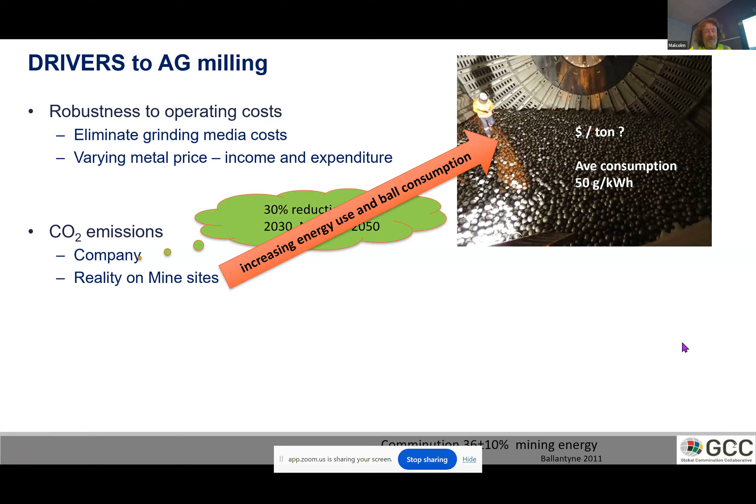However, quite standard around the industry is we're increasing energy use, kilowatt hours per ton, and ball consumption by converting to more of a SAG mill or run-of-mine ball mill, and therefore pushing up our steel consumption and steel use. So the reality is really different to what we're proposing as an industry.

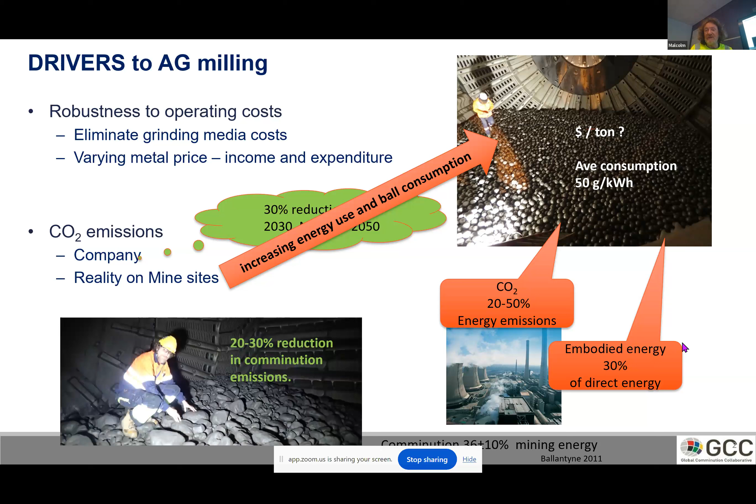If we look at what's the CO2 emission from the grinding media side, it depends very much, of course, on the ore and the fraction of grinding media and how fine you're grinding. But somewhere 20 to 50% of our emissions are from the grinding media because of the production of the steel and the transport of the steel - significant factors in the CO2 emission. Then the embodied energy or indirect energy that goes into manufacturing of the steel grinding media is about 30% of direct energy. So about 20 to 30% reduction in comminution emissions is a viable target by going to ag.

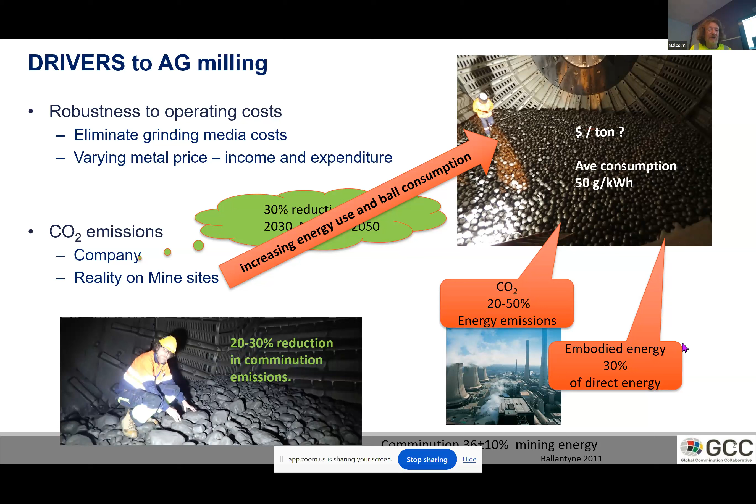Is that forwarded to the next slide, Tulia? Ag mill risks and challenges? Yes, everything is right. Oh, good.

So why don't we just ag mill? Having said that, well, it's a great thing. Well, why aren't we all doing it? There's always a reason, of course.

The original reason we started with ag milling and converted to SAG and then high and ball load is the sensitivity to ore variability. So the rock I'm holding, how competent is the rock that forms the grinding media? And if it's too competent, you overload and can lose your grinding charge. If it's too soft, you can swing between overloaded and underloaded.

At variable feed rate sensitivity, the pebble discharge rate varies a lot depending on the size distribution and competence. It varies with SAG milling too, but it's more sensitive in ag milling.

The other thing is it naturally produces a fine product because there's a lot of abrasion. Those pebbles on the right that are wearing out produce really fine, sub-100 micron material by abrasion.

So uptake barriers: can we predict the performance reliably? When I look at putting in an ag mill somewhere, or speaking to someone about putting it in, well, we're not sure. Should it be this size or that size? How sensitive to variability? What's the rock going to be in 5 years' time, 10 years' time? Will it still be suitable to an ag mill?

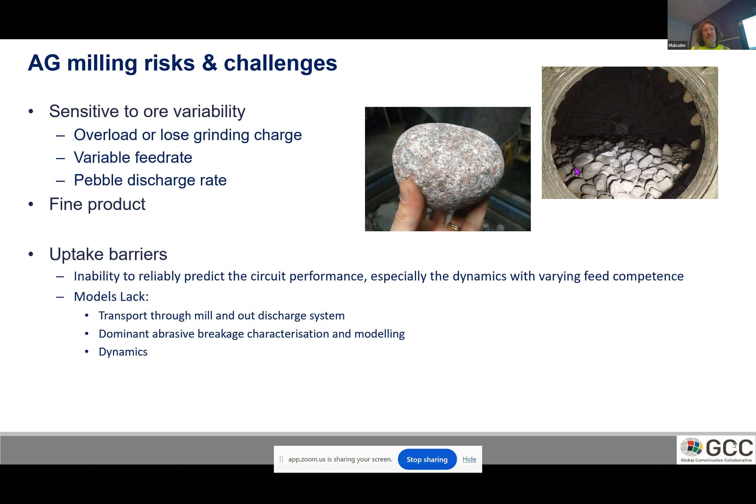How is this mill going to vary rather than the average? The variability is really important in understanding the process. And it's a risk, justifiably seen in the industry, saying well, if we just fill it with balls it's more stable - which is true, but not fully true.

So what are the uptake barriers going to the feed variability, characterization across the ore body? How is it going to vary over time? And are we characterizing it in a way suitable for understanding ag milling? We've got two - one, we need to characterize it more than the other. We need to characterize it in a way to understand, for example, the abrasive side of it.

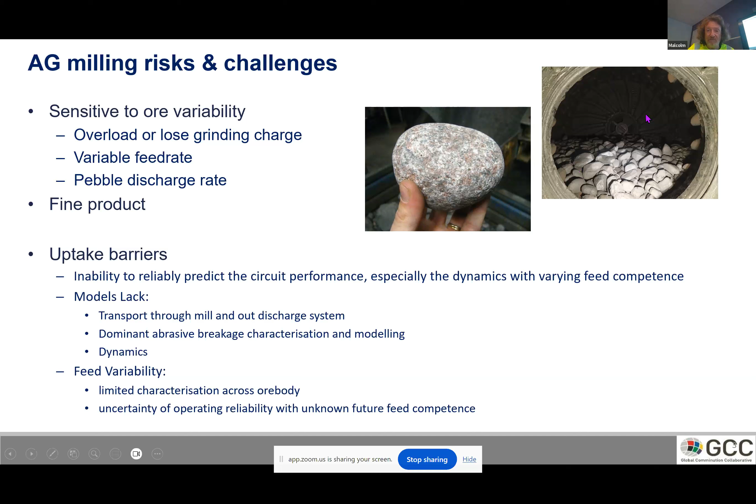But there are many successes. There's the 22 megawatt Aitik Boliden mill. There's the whole bunch of Boliden mills I mentioned, been going for 70 years. LKAB, many more in Scandinavia, Olympic Dam in Australia - just to have a nod to my home country.

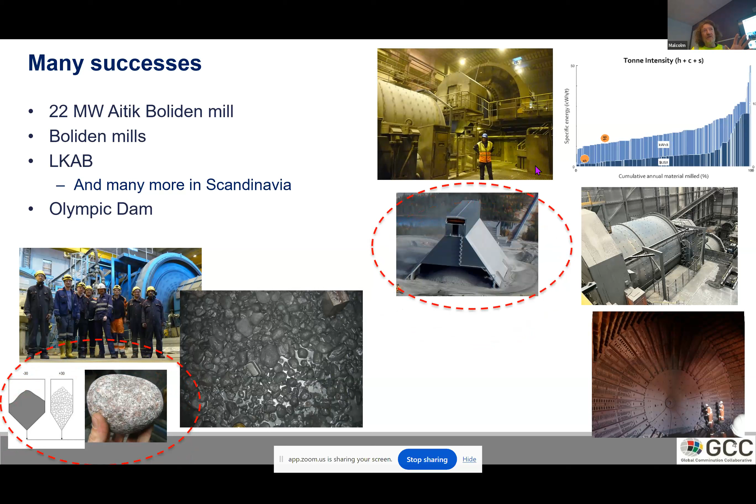But there's something interesting. If I look at LKAB, bottom left, they have a separate bin which they use to separate the coarse and the fine, and they can use that for controlling the balance, which they do. Aitik has that big A-frame feeder so that they can distribute material between the two parallel mills and get a more stable feed coming in.

Plus, it's not in the photograph, but on the mining side, every daily meeting is about what blend you're sending - you can't be out of spec for the ag mills. So it's not just grades, it's actually competence spec, and they're right on top of it.

And the bottom photograph with Mohsen and I is one of my greatest moments in my research career - we controlled that mill to 21 plus or minus 0.1 megawatts for 3 hours, fully ag. That's just amazing, and that was due to the fact that they control the blend from the mine and control it at the stockpile. So yes, you can have stable feed and stable production.

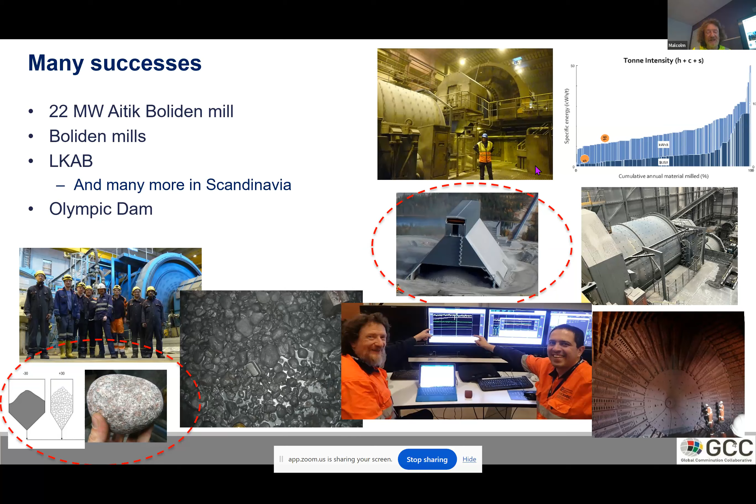And the mill length - adding power by just adding mill length is not a linear increase in feed rate by any means. This is where they came to us with queries about it. So they've eventually gone, because of the uncertainty of that and the discharge, pebble discharge, they're doing aggressive fine crushing of the pebble recycle, which is an excellent thing to do.

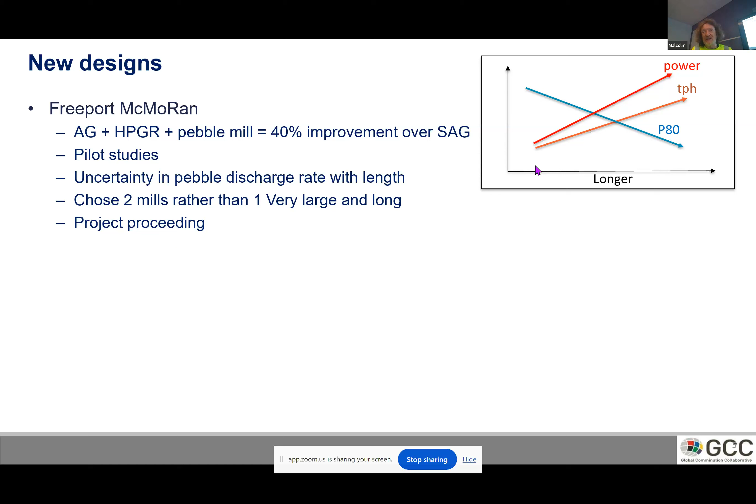They've gone for 2 mills. We weren't able to answer these questions, and in the brief time we had, we had a look at it, trying to extend our models.

Another one I did, with Marcelo and a PhD student, a masters student, was itabirite ore - everyone knows there's no way you should be able to AG mill it, it's too soft. However, you just need to have sufficient of the competent intersect layer, so the interface layer, to get enough rock in the mill.

So you can see on the left, absolutely fine. On the right, not enough rock in the mill - it just completely grinds out to sand. So yes, it's possible, and it is a lower size specific energy than SAG milling, but you need to control the feed. If you don't have that handle on your feed, you've got a soft feed, you're going to run into trouble.

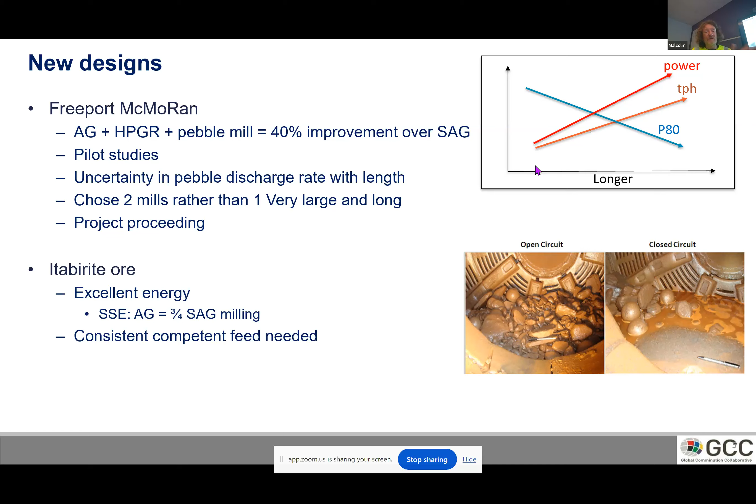So I see the uptake, being able to predict what your circuit is going to do, is a real key to uptake - so if you're going to predict the design of a mill circuit, production and mine planning, daily operation, that I indicated at the beginning, that's one of our major risks or barriers to uptake.

And the other is the dynamics - the control, the hour-by-hour control. What if the ore type changes? Dealing with surges coming in, with the load going up and down, content changing in the mill. What if I increase pebble port size? What happens if I'm more aggressive with the recycle crusher?

And the high overall equipment effectiveness - you want to make sure you can push your mill to drawing the full power and getting the full use out of it while stabilizing the product. All of this is kind of a dream in mineral processing when we're varying the input - it's not actually possible to have a completely stable output, all aspects stable, when you're varying the input.

You've got to choose what you're going to vary. So you could go for a stable product size and vary feed rate, for instance. But the more we understand blending - for instance the coarser or more competent with the softer - we can maintain that balance within a window.

It's not a point, so it's not a PID loop - within a range you get this amazingly stable operation. It's quite interesting - you can be 20, 30% around a midpoint, and your mill will be stable.

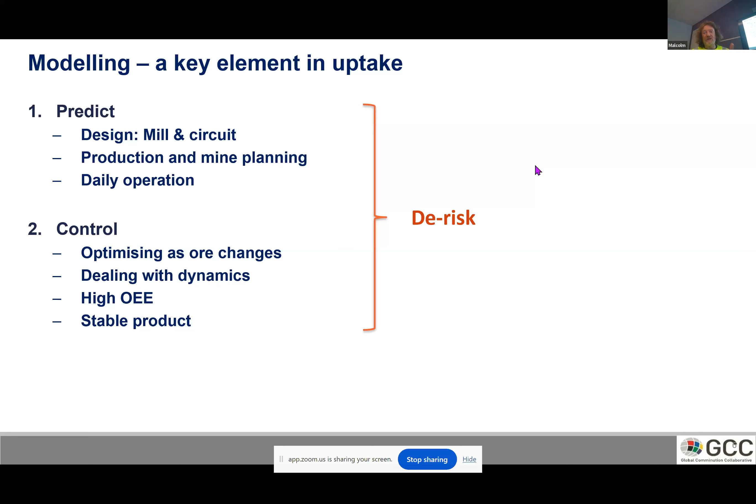So how do we de-risk this? What are the essential subcomponents we have? Well, the feed - and the feed varies. So what happens in the mill?

We've got breakage with impact, we've got attrition, we've got slurry grinding between the balls. So we've got this whole grinding action that we really want to emulate in our models, not have some backfitted rates model. We actually, to understand and predict this reliably, need to understand what's in there - and that competent feed greatly dominates the content.

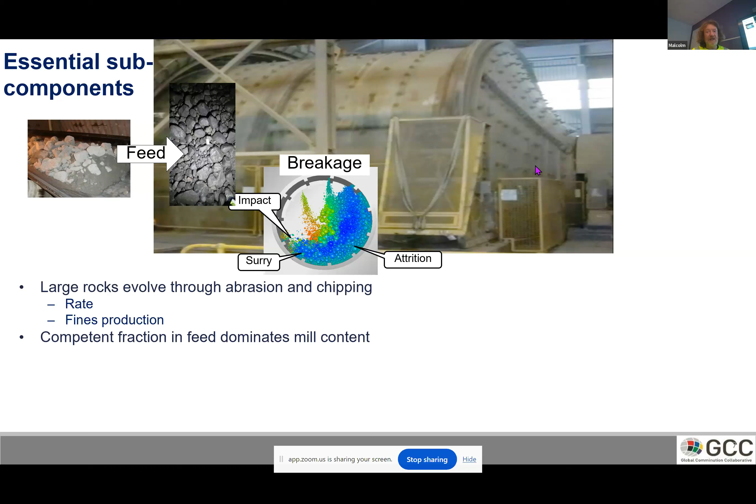Then the transport, which we'll come to next with Guillaume - how does this transport down the mill? I've got some great photographs in the ITEC mill I presented in the previous SAG conference, where as we changed the filling, we got a different size distribution down the mill. So it was changing with the filling as it went from 20, 28, 35% filling - it changed the content in the mill.

The feed was in all cases equivalent, so the content is not well mixed - the discharge is completely different to the feed end. So to have success in modeling this, and definitely to have success in modeling dynamics, we've got to have a transport model where the model sees the change in content down the mill and knows, by size, the probability or rate of transport.

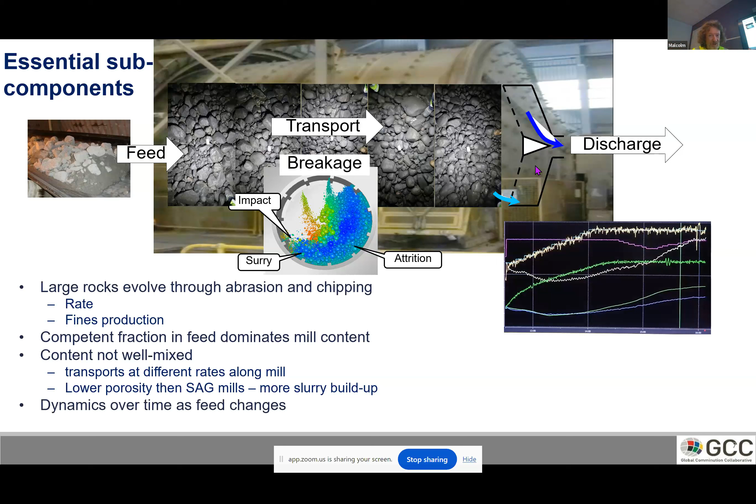And then, of course, discharge, which is an independent function, independent of transport through the charge - how does that vary as I change the design, as the percent solids change, as I change the mill speed, and so on.

So I can really break down the mill, and that's what we've endeavored to do, but it's not a completed model. Large rocks evolve through abrasion and chipping, the competent fraction dominates, content is not well mixed, and dynamics change over time as the feed varies, like the graph on the right. How is that varying as we were bringing that mill into stability and slowly tweaking the feed? These bits in the box are all lacking in standard SAG mill models.

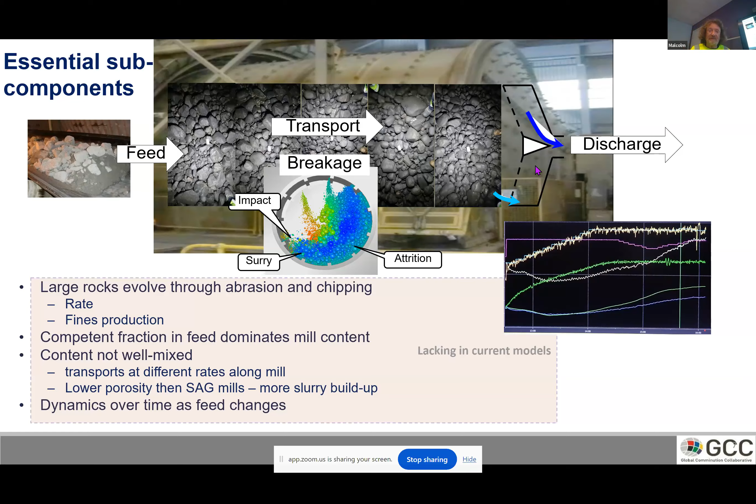So what are the building blocks? Abrasion breakage - we've developed a test at the JK which is purely abrasion, or as close as we can get to it. Unfortunately it uses a few hundred kilograms, so this is not going to be an ore body characterization test. However, if we can characterize into classes, we could test, say, the three major classes. Our objective is to move it into a small scale test, but we're not there yet.

Mohsen and I have worked on this with multiple students as well. It really needs a big push on the research side. Incremental damage breakage - a lot of work done, Marcelo's group, I've done a whole lot at the JK. We have a standard methodology, published methods of incremental damage where the rocks will slowly weaken and then break.

Multi-component impact breakage, where you've got different ore types - what's the probability of breakage? This is a cumulative distribution of fracture energy. Marcelo, coming out of the Utah group with Peter King, brought this to us, and we're using this strongly now in our modeling. You get a distribution of strength per ore type, not just an average. And the AG mills are more sensitive than SAG to that.

And the transport graph at the end, that will link to Guillaume's work on transport through the mill. Then I refitted just a discharge function, and it's rather different to the bulk one we fit at the moment, which is transport through the mill and out the mill all in one function. It is really different, with completely different rates out through the grates.

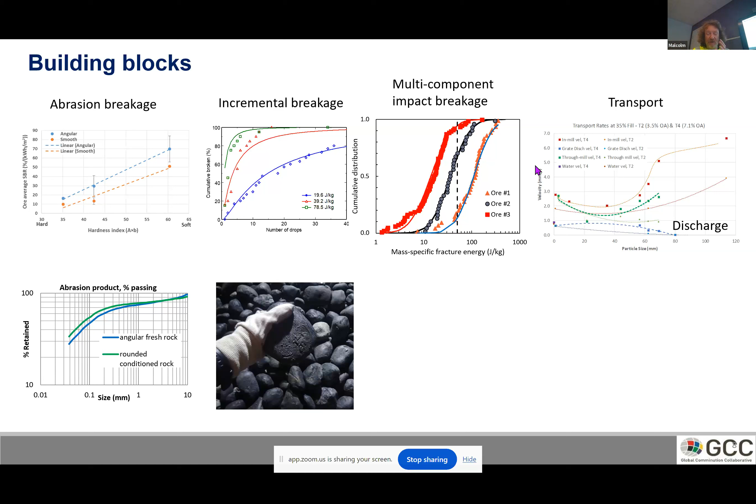Oh, someone needs to mute Magnus.

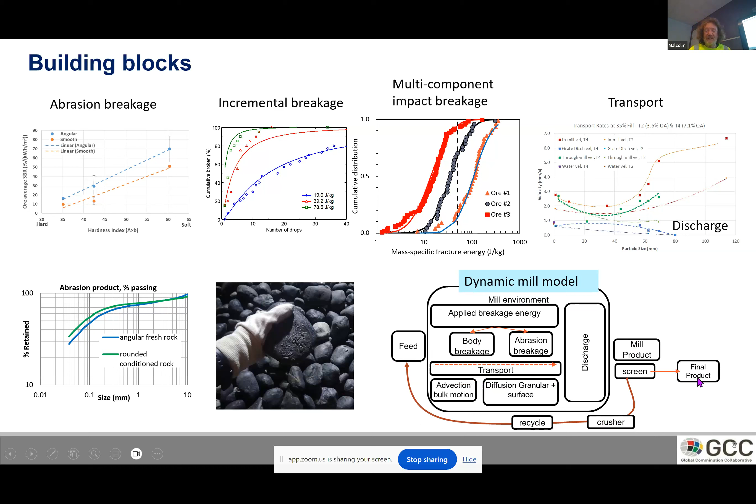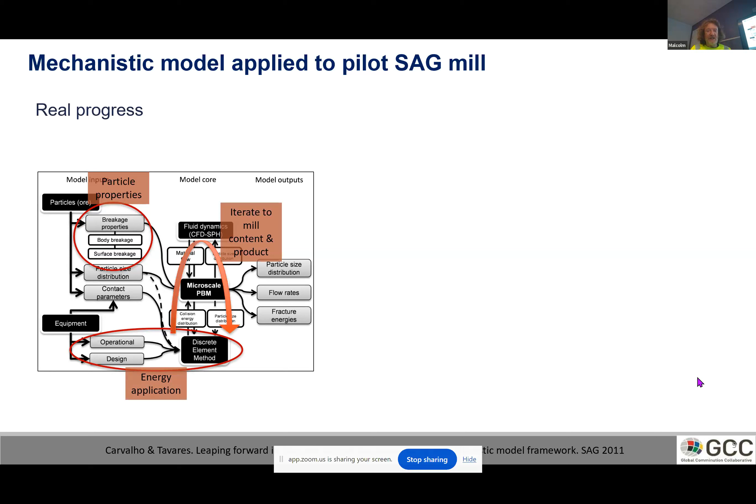So we have that, a fully dynamic framework running that. And Marcelo's gone one further with that - a microscale population balance model. Complex diagram, but I'll just go through it: in the front you have particle properties, individual particle breakage. In the core, we have energy application to the individual particles, the rate and probability of application. And then iterate to get a mill content, and then out of it, predict a product.

So this was actually done with some DEM steps in between with Rodrigo, and this is fully predictive. This is not backfitting of rates. This is: I measured the ore properties, I did a simulation, I got a product. And I did the test work and I got a product. These are amazingly good. So there really is a viable capability of doing this.

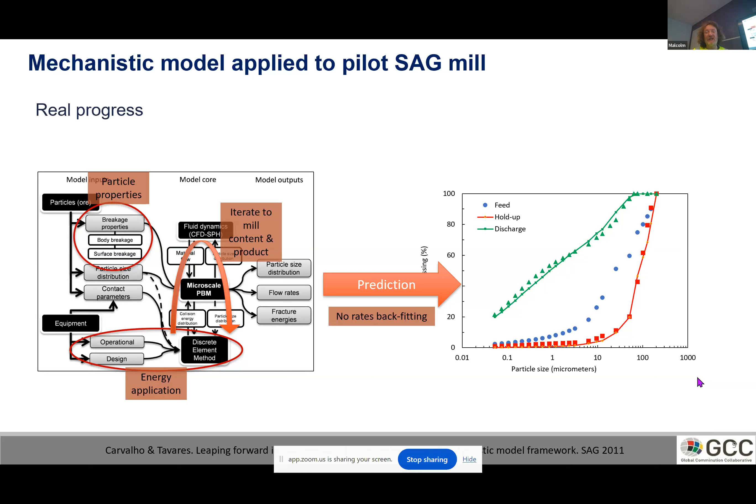This is a slow process in here, so getting it to be an online fast model becomes the challenge.

This is work I did originally with Ben Bonfils, the early version of our dynamic model. You see the top left is the contents evolving in each slice of the mill, and we see the cyclone overflow P80. We started with an empty mill and filled it up. You see the sump level in there, that's in that circuit I was showing, and then the P80 in each slice. So there we're evolving content in a mill, and there is convergence.

If I give it a stable feed, it will get to a stable content. If I vary the feed, it will keep varying.

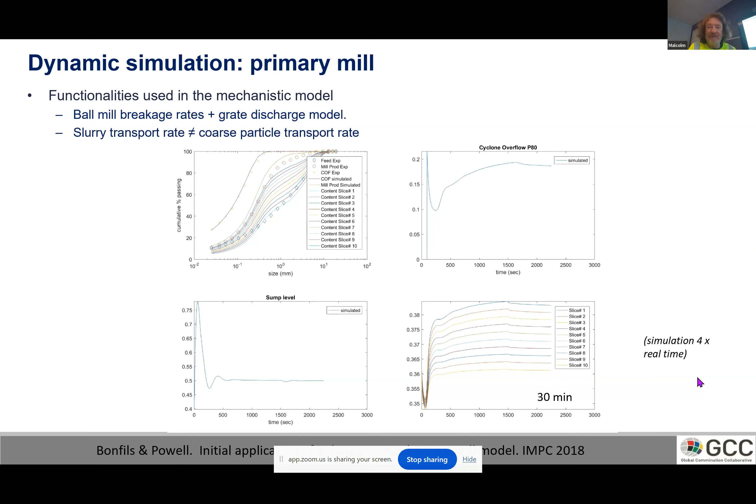So, upgraded mechanistic AG model. I've got a whole list there which I'm not going to read through, but de-risking design - I've been looking at flexi circuits for many years, really having a circuit where I could put a screen up front, take a split to a crusher, take the oversized to an AG mill, link to a pebble mill, pebbles to feed the pebble mill, and the rest recycle, possibly to a variable splitter, waste sorting, maybe an HPGR or another crusher. I couldn't simulate this except at a kind of conceptual level.

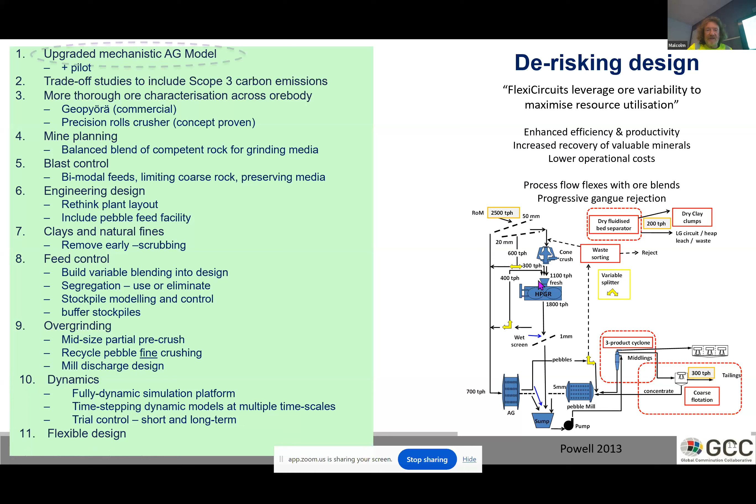And if I look now, what would I need to do that? The upgraded ag model, more thorough ore characterizations. I'm working with Geopyörä, I'm in the company. That looks like part of the information we can penetrate into the ore body. Precision rolls crush, I'm doing with Shuja, who's also on the seminar. Well proven for fine breakage, still lacking abrasion into the ore body.

Feed control. So you've got a dynamic system and you can test feed control systems on it. So you need a dynamic platform to get all these dynamics in.

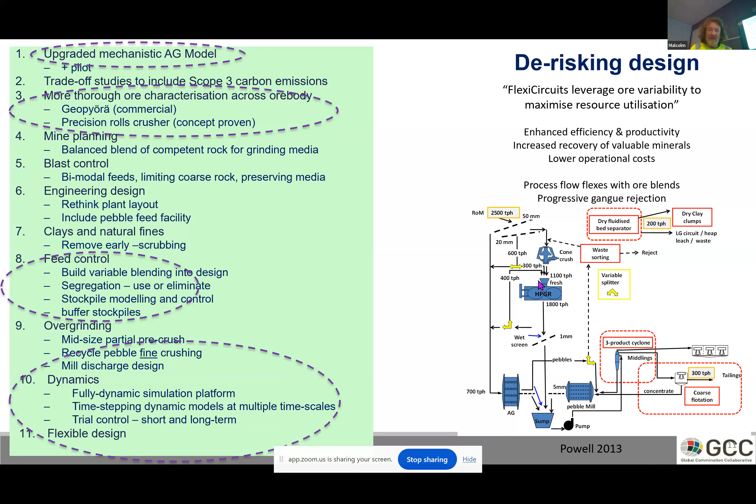But the good news is the GCC has come to the rescue. So there's the GCC. How about joining the team? And down here, I've got DyssolTEC.

We're working with a new open source dynamic platform developed on EU funding, to put an open source base and then a funded base with our models inside. Of course, we need funding to put them all in and have a truly dynamic platform with dynamic models in it, and that's where we're aspiring to go. Then we can look at the dynamics of a process. Our specific initial target is to get the AG mill onto that platform.

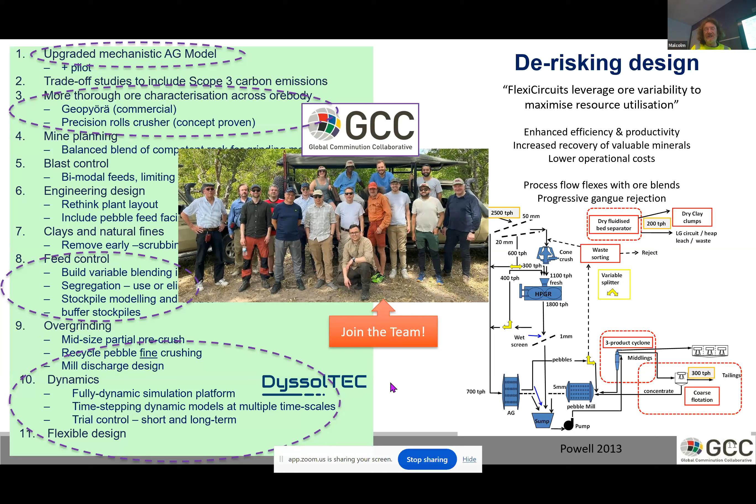So I hope that was fascinating, interesting, and fun. We won't take any questions now. I'm going to hand over to Guillaume to take you on the transport part of the presentation.

Thank you, Malcolm. This was indeed very interesting. All right, let me just share my screen. Let me know when you guys can actually see it. I'm seeing it, that's good. Yeah, we can see it.

All right, excellent. Well, thank you all for assisting to this seminar. I am Guillaume Chiasson from SGS, working from the Lakefield office in Canada. I'm here today to present the work we've done on a pilot study to look after rock transport rates and ag milling. I want to thank Malcolm, of course, for allowing me to be part of this research project, as well as André Vien from Freeport-McMoRan, who has funded this research program.

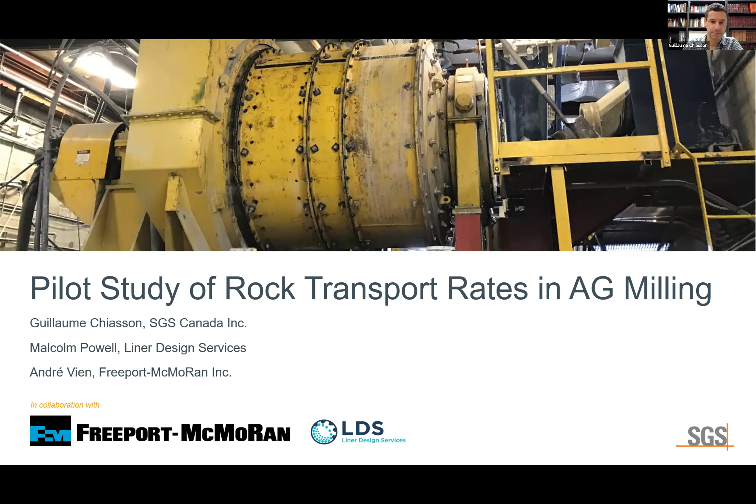Over a few years, Freeport-McMoRan has done extensive piloting here at SGS as part of a pre-feasibility study. We've looked at multiple grinding circuit configurations at pilot scale, including ag milling, HPGR used as a pebble crushing, pebble milling, SABC as well, single stage ag milling, a whole bunch of circuits. Among all this, some unexpected results occurred, such as material transport issues in pebble milling, as well as the impact of ag mill aspect ratio that Malcolm was talking about a bit earlier.

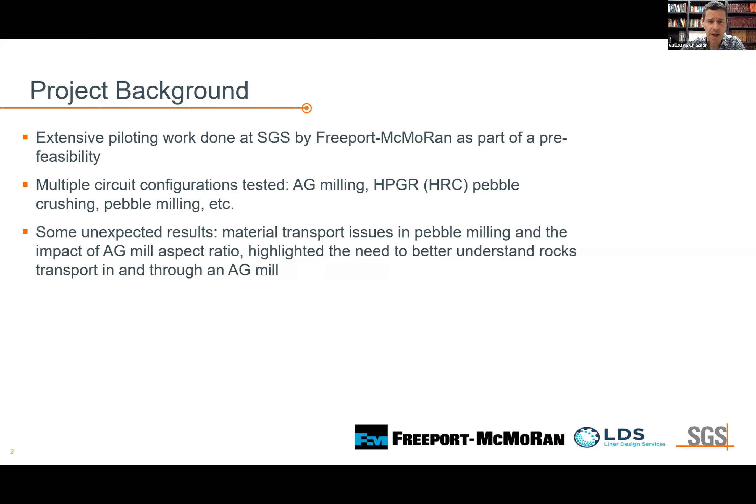Having a longer mill didn't necessarily mean a higher throughput, but rather a finer product. This highlighted the need to better understand rock transport in and through an ag mill.

So 4 pilot plant experiments were designed to meet certain objectives. For instance, we wanted to try to measure the residence time of rock particles through the mill at different size classes. We also wanted to measure the in-mill transport rates independent of the mill discharge. From these 2 measurements, we could then calculate the grate discharge rate of the particles.

To do that, 4 pilot plant experiments named T1 to T4 were done. We tested 2 different mill filling levels, a low mill filling of 25% and a high mill filling of 35%, as well as 2 open areas, a low open area and a high open area of 3.5% and 7.1% respectively.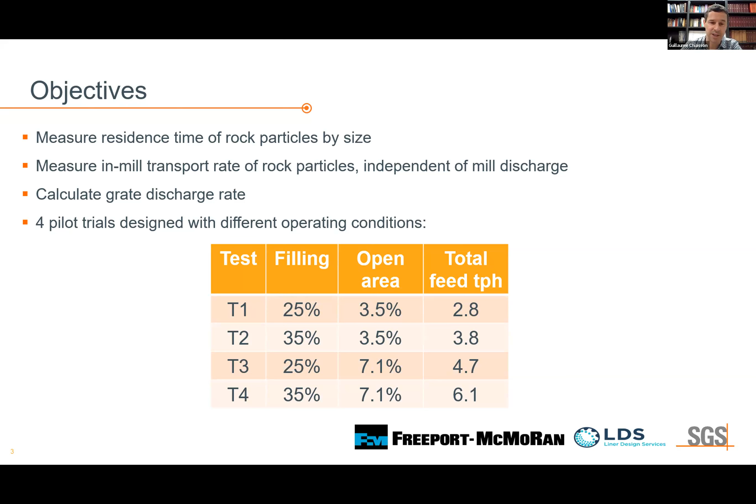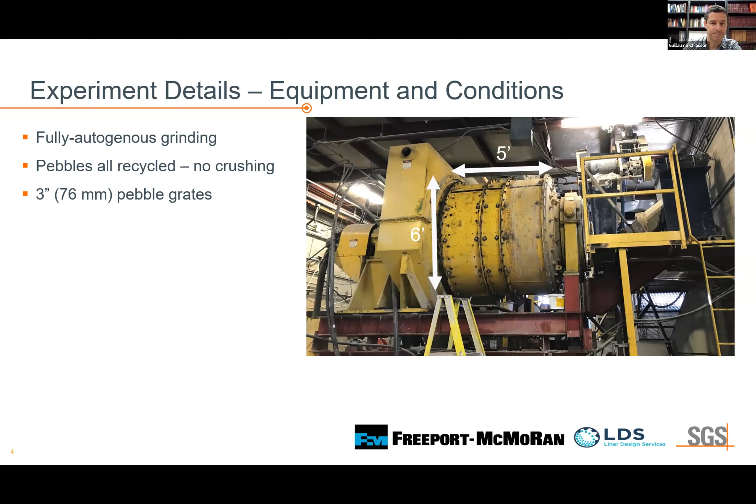This work was done in a 6-foot diameter mill by a 5-foot long mill, all fully autogenous obviously. The pebbles were all recycled back in the mill with no crushing. The idea was really to study the transport of coarse particles. We were using 3-inch grates, so 76 millimeter, in the mill. So we essentially had 2 main experiments.

The first type of test we did, we called it the residence time tracer test. In this test, we initially used painted pebbles as tracers. We used 3 classes of particles with 50 tracers each: a fine class of 19-25 millimeter, medium class of 38-51 millimeter, and a coarser class of 51-76 millimeter, which was right below the grate size. So the particles were obviously still able to get out of the mill. At steady state, we were adding 1 size class of tracers in the mill.

And because it's a pilot mill, the discharge is fully accessible by operators. So the mill discharge was discharging on a 48-inch screen, and we could manually recover the tracers as they were discharging on the screen. This was all videotaped, so we could accurately determine the time of the particles that discharged, and the time was recorded.

Unfortunately, not all tracers were recovered initially. As we can see in this picture, all these tracers from the 51-76 millimeter size class were originally all green. We had 3 to 4 layers of paint on each tracer, but the paint didn't last very well, and for many tracers only a few little pixels of green paint were left. Also unfortunately, a lot of the pebbles got destroyed or half ground in the mill, so for some we recovered only pieces of tracers.

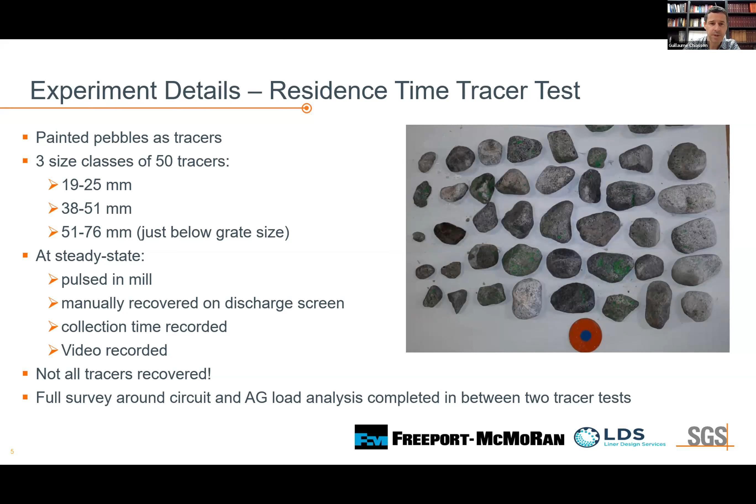Starting on the second test, we replaced the painted tracers with ceramic balls, which we use in different grinding applications. We used the same 3 classes: 19-25mm, 38-51mm, and 51-76mm. But as we made the coarsest size fraction, we realized this size was actually made of 2 distinct classes of balls, 51-63 and 63-76mm. So we decided to use that coarser group and divide it into 2 subgroups to get additional information. In this picture we can see the screen, the yellow operator top right, and a middle-sized tracer, and in another picture the small 19-25mm tracer bouncing on the screen.

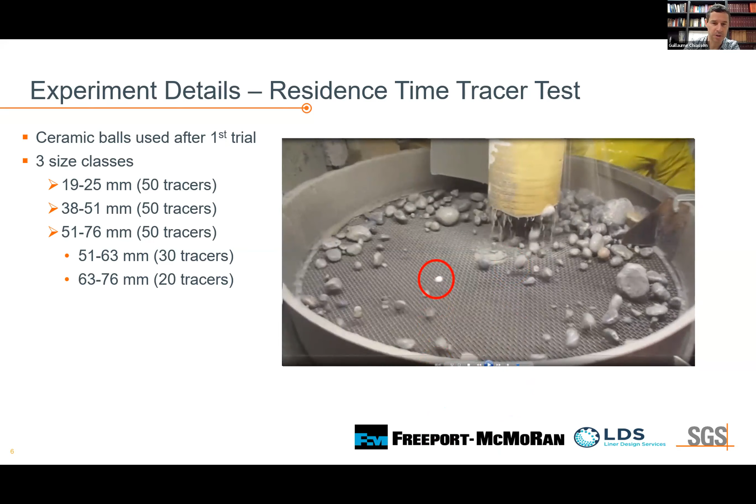The second test we did is the in-mill tracer test. In this test we used only 2 size classes of tracers with 20 tracers each: a 51-76mm size class near the size of the grate but smaller, and larger tracers of 102-127mm that were coarser than the grate and couldn't discharge out of the mill. Between 2 to 4 minutes before the actual ag mill crash-stop, these 2 size classes were added to the mill in 10 second intervals, which slightly disturbed the mill but not too badly. We let the material tumble for a few minutes, then crash-stopped the mill, got inside, and took pictures of the tracers like we see here.

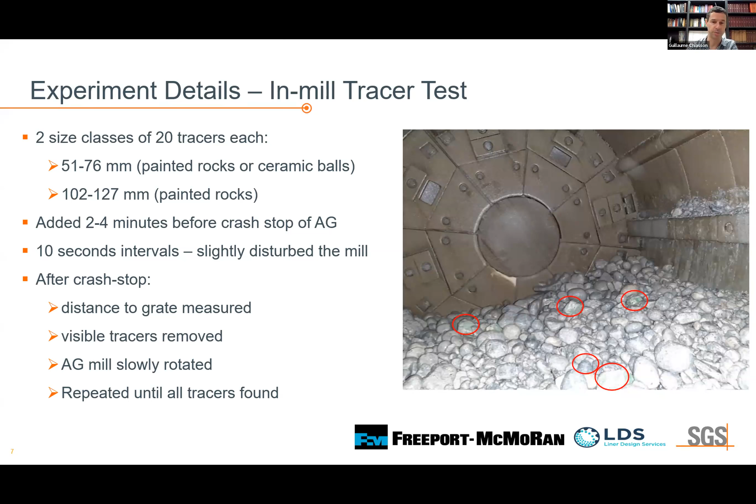We measured the distance between the discharge grate and the center of each tracer found, then all visible tracers were removed from the discharge. The mill was slowly rotated to expose new lifters, we got back in the mill, took new measurements, and this was repeated until all tracers were found. Here's another picture from this process.

Now looking at the results for the third test at 25% mill filling and 7.1% open area, the median of all 4 size classes is much quicker. They varied from 8 to 11 minutes for the 3 coarser size classes, and 14 minutes for the finer size class, so it's much quicker than the previous test.

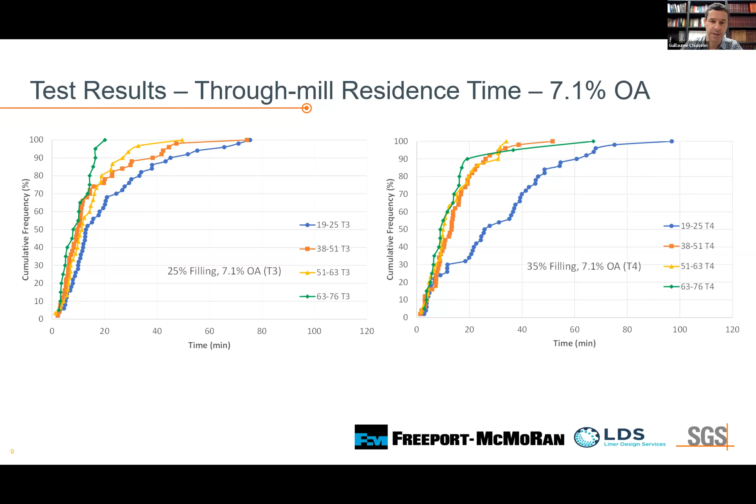If we look at the impact of mill filling on the rocks just below grate size, looking at the 51-76 millimeter rocks, we can see that at high open area, mill filling didn't impact anything really, because the two curves are essentially overlapping, at least for the coarser particles. It's not necessarily true for the finer particles, but for the near grate size, it didn't have too much impact.

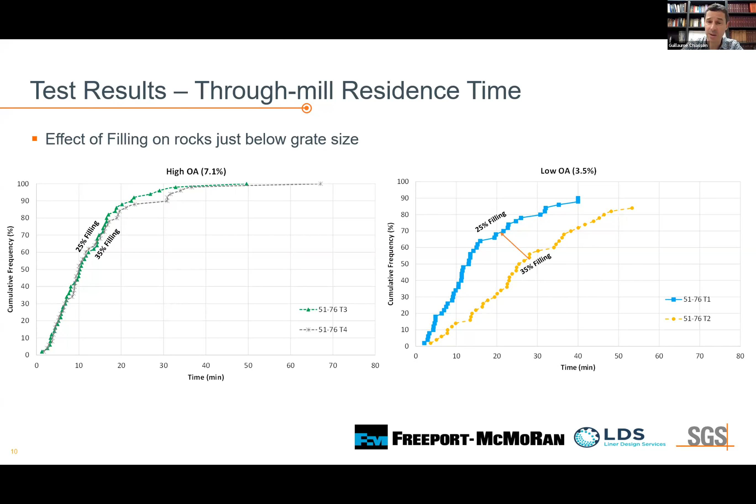If we look at the low open area, then the story is different. The low mill filling resulted in particles discharging a lot faster out of the mill than at high mill filling. That seems quite obvious from this graph.

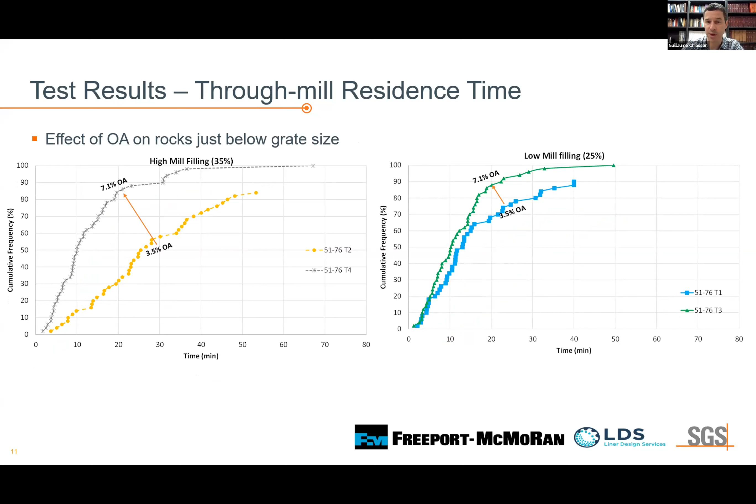If we look at it from the open area point of view, at high mill filling, 35%, a higher open area resulted in particles discharging a lot faster out of the mill, which seems to make sense. At low mill filling though, we've seen the same impact, but the difference is not as big. So the open area does help, but the influence is lower.

If we look at the results of the third test, at low mill filling and high open area, it's the other way around. In this case we've stopped the test a bit too late, because we can see a lot of the coarsest media is within the last 30 centimeters of the mill. But we can see that again, the coarser media travel faster than the finer media.

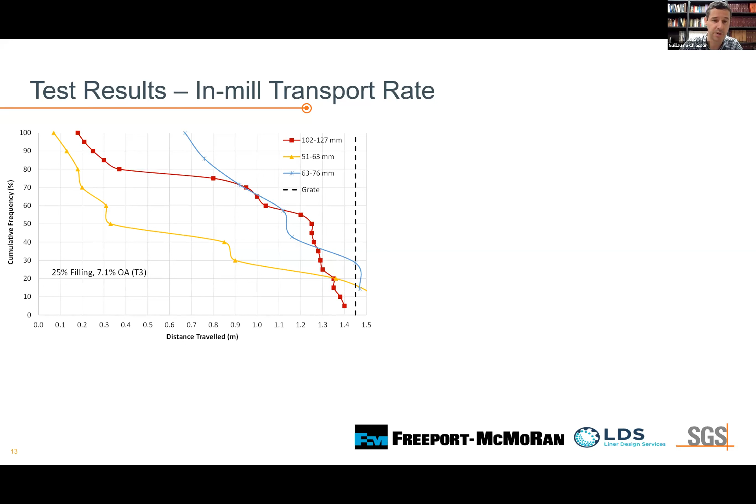Now, if we express the test results in terms of particle velocities, we see the velocity of the particles discharging out of the mill. I'm not going to go through the calculation details because it's a bit tricky regarding the discharge, but nonetheless what we can see here is the velocity of the finer particles is much slower than the velocity of the coarser particles. But this is the through-mill velocity.

If we look at the in-mill velocities, represented by the two additional curves here, we see that the in-mill velocities of the particles are much higher, but again, the coarser particles are traveling a lot faster in the mill.

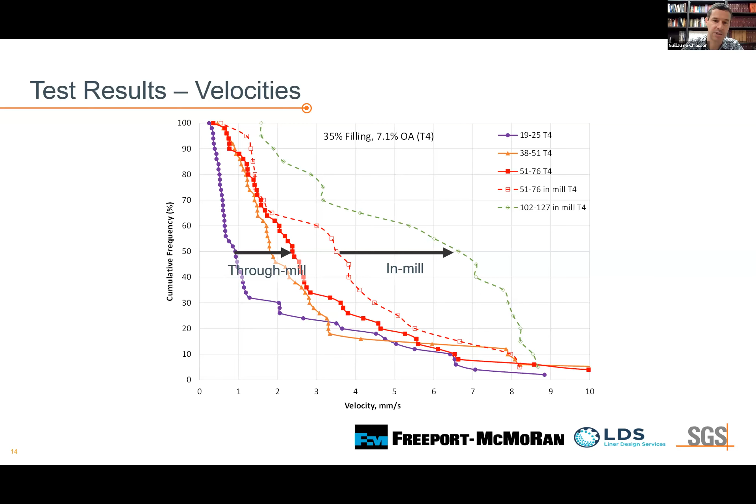Now, by looking at the difference of the two types of velocities, it's not quite direct, but anyway, this is one way to look at it.

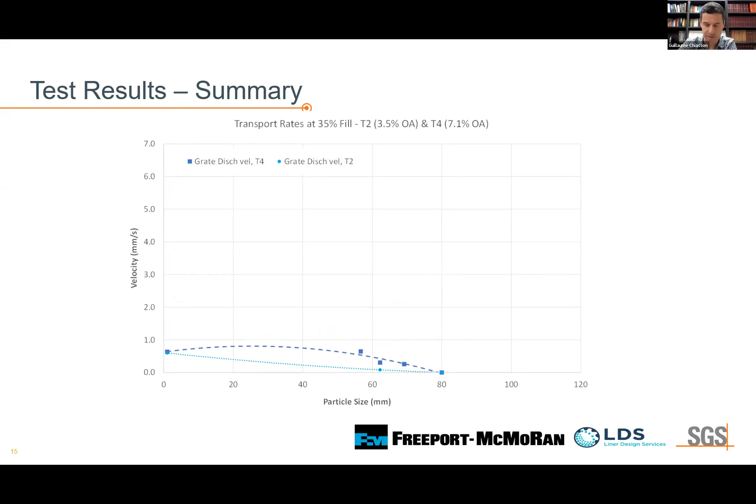Same kind of conclusion for the through-mill velocities, although at the finer size, it seems to be relatively similar. And then I think I'm running out of time here.

So let's conclude this quickly. Surprising conclusions: the larger particles are moving faster in the mill, whereas we tend to think normally that the fines will essentially bypass the mill and the coarser particles are the slow guys in the mill.

The slower transport rate for small particles is amplified for higher mill filling. There's a clear influence of open area on through mill residence time.

At low open area, the grate discharge is definitely the bottleneck, and all particles are behaving more or less the same through the mill residence time.

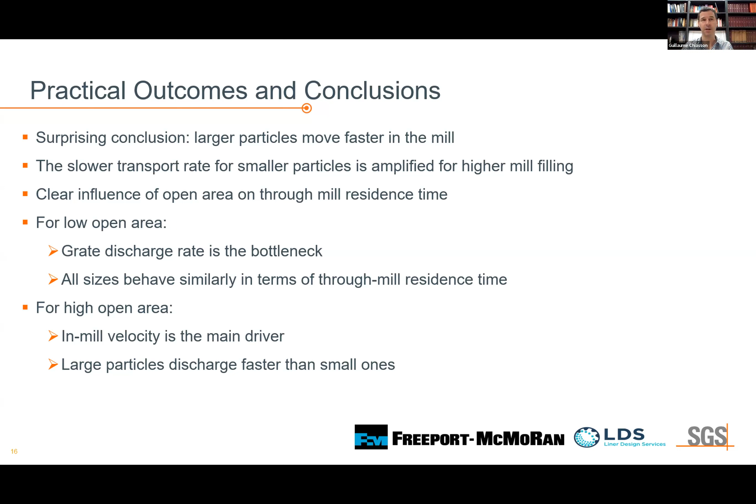However, at high open area, it's the in-mill velocity that becomes the main driver, and therefore the larger particles will discharge a lot faster out of the mill.

So this project led to significantly better understanding of the transport of particles through and in the mill by separating the two mechanisms. It has obviously an impact on better understanding the pebble buildup and the pebble discharge out of the mill. And I really want to thank you, Malcolm, but also Freeport for making this experiment possible

and allowing us to publish these results. So that's it for me.

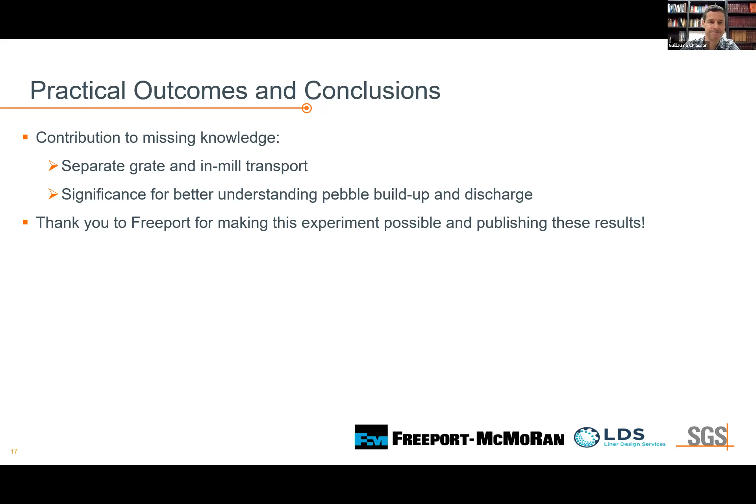Hello, can you guys still hear me? Yeah, well, excellent. I think Malcolm may have been having a technical difficulty. Thanks, Guillaume. Maybe Aubrey, if you're ready, you can take over for the last part of the presentation. Thank you, Marcelo. I am ready, but I'm not being allowed to share. I think you are, Aubrey. Maybe you can check. I can now share. I wasn't a few minutes ago. Yeah, sorry, it was me that was still sharing my presentation. Sorry. Yeah, I think so.

So what I'm going to present this afternoon, or morning, or evening, depending on where you are, is a presentation that I gave at the SAG conference on behalf of a whole host of people.

The theme was the AG/SAG mill design for low competency ores, and the co-authors for this paper were Sandile, who should be in the audience today. I haven't looked at the participants, and then Malcolm, as well as Talita Bell from Tronox.

So this is the work which was done at Mintek using the pilot plant and other mills that they have. The motivation for this work is that Tronox are in the mineral sands business, and they have been mining the mineral sands for many years.

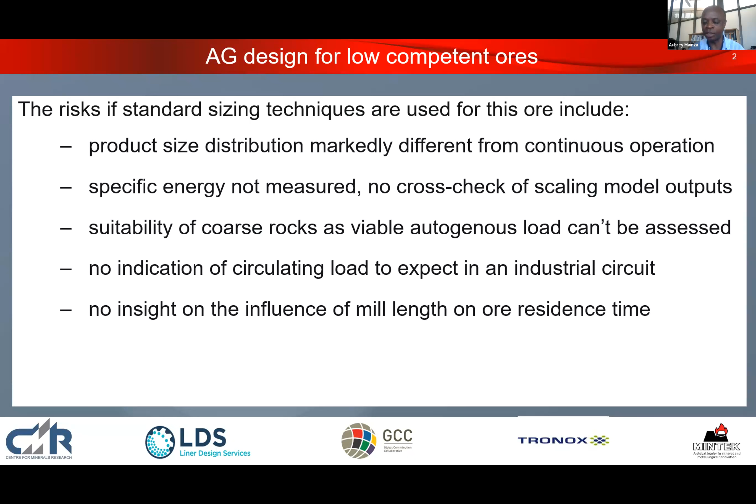The last part is it is very difficult to work out what a mill length would be. This touches on the previous presentation where they did residence time studies. You wouldn't know how long the material would last in the mill to get to the size you want, so inferring whether you have a long mill or short mill is very hard to predict from our conventional models. Based on that, a number of studies were proposed.

This work was done for Tronox, who currently are using an AG operation to process the ore on the neighboring plant, called the waste plant. Because of the new ore they have found, they are in the process of designing a milling circuit. Now all those questions and comments I gave previously are things that were put on the table, if they implement the AG milling, which is preferred because they are using the same technology on the waste ore.

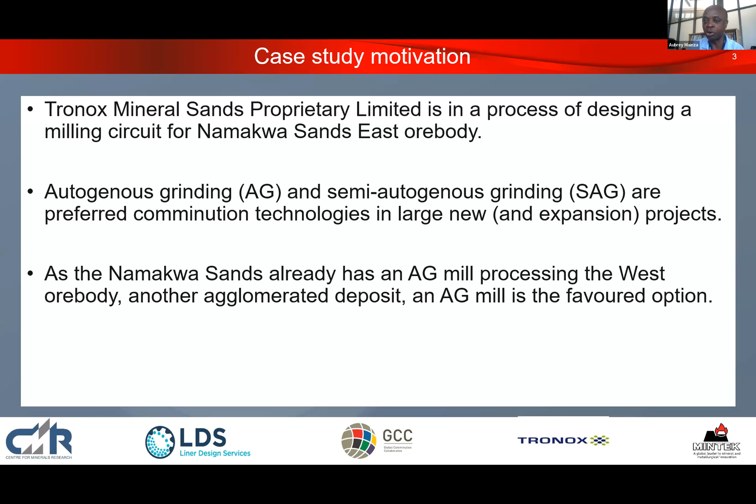What would be the length of the mill? Would the mill be able to hold the load? What would be the circulating load? What is the competence of this rock to act as media? Because of those questions, they commissioned this study.

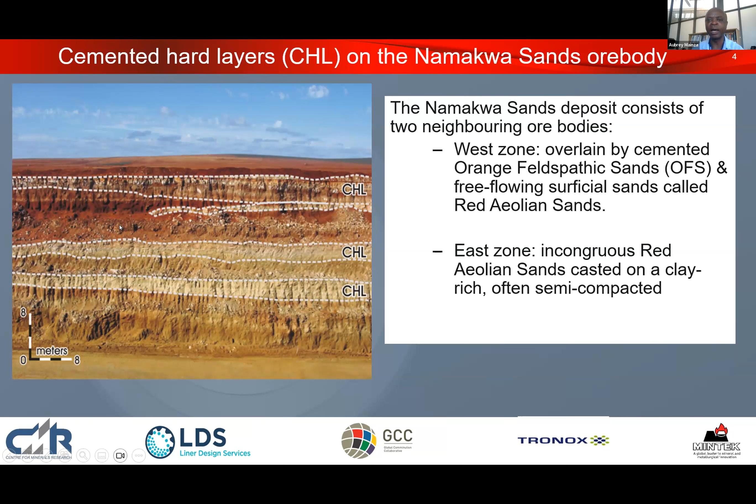But the east material has predominantly this layer more than that orange layer. So this orange layer has a bit of competent material in it, but that reddish material you see in there has a lot of incompetent material to act as grinding media.

Just to give you an idea, when I speak about incompetent material and competent material, I'll take you to this particular graph or table. You would see in this table, if you just look at the A by B number, for those familiar with the drop weight test results: if the A by B is low, it means your ore is very competent, very hard to break using impact. If your A by B is very high, it means your ore is very soft.

Now these numbers here, we have A by B numbers of 565, 962. Those of you familiar with the JK drop weight test table, they are not even in the table. They are too soft, such that we've not encountered these numbers before. So these are extremely friable and soft.

The west ore, or the west reef ore, which you see here as 312, is more competent than this, but even when you look at that JK drop weight test table, this is actually classified as very soft. So if this is very soft, I would shudder to think of what we would think of the other numbers that are above 500. If you look at the resistance to breakage by abrasion, which is this Ta, these numbers are very high as well compared to what we've encountered in the database.

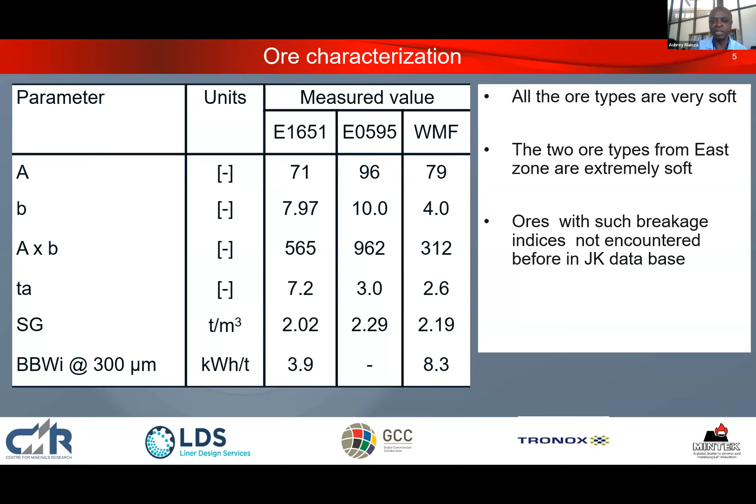The first test that was proposed and carried out by Sandile, who is in the audience, is the rock survivability test. The test is carried out by charging your rock survivability mill, which is this one here. You can see material is sized into various coarse fractions, then you charge it into the mill at up to a particular volumetric feeding.

Then you run the material for a period of time. You open, you discharge the material, resize it, remove the fines, charge it again and top up. For this particular material, the test was terminated at the first stage because the charge was found to be below 7%, which is very low.

Assume you are coming from, say, 35%, and you run one cycle and you are below 7%. It tells you that the mill can't hold the material. The material breaks very quickly. You can see the pictures here at the bottom, the fines and what has come out of the mill. There is a very small proportion of coarse material in there.

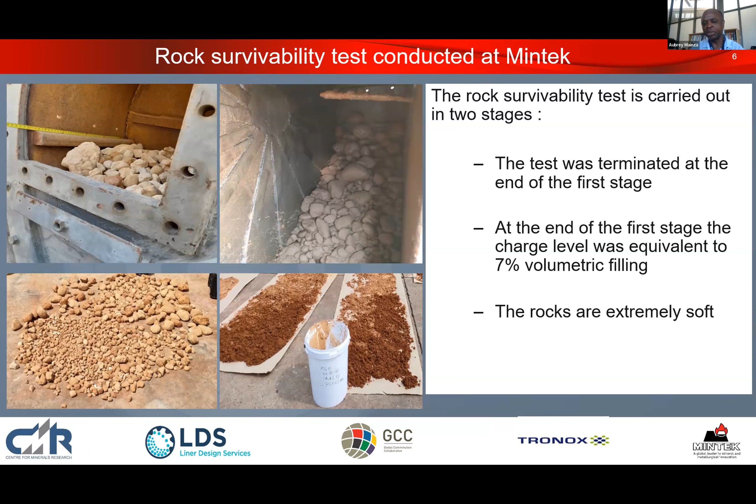So this confirmed that we would not be able to hold the load in an ag milling operation with this material. But our client and the design company were still insisting that they would like to design an ag mill, because that test does not speak to what they were doing in the model they were using. So we had to propose to do a pilot study, and we did a pilot study at Mintek, which has a Rolls-Royce piloting mill.

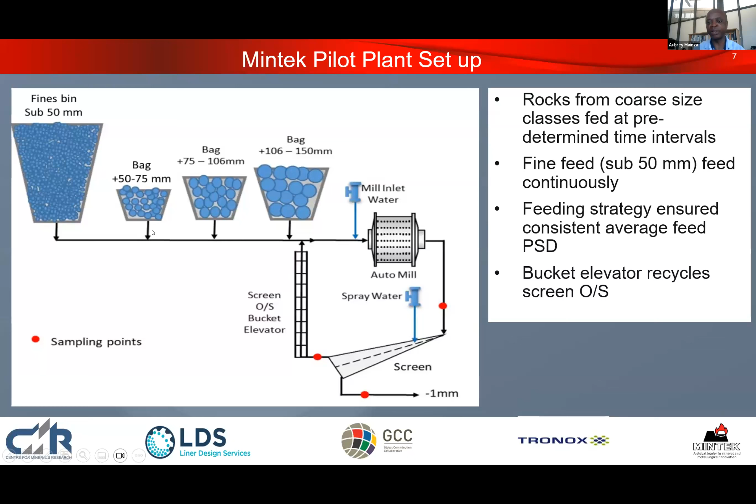The circuit used in that study would be like this one. You can see this is the ag mill, and the material from the ag mill discharges on a 1 mm screen. The plus 1 mm screen material would be transported back to the mill using a bucket elevator. Then they have a silo at Mintek where you can charge the sub 50 mm material, and you draw it using a belt feeder. We were charging other proportions of sizes manually at a timed interval to meet the required feed size distribution.

These are just the pictures of the system. You would see this is the material, the sub 50 mm material from the silo, discharges using that feeder, and we have this belt putting it on the main belt that feeds the grinding mill. What you can see from here is that we don't have rocks. Even after charging the coarser rocks to meet that PSD, you can count the few rocks on that belt.

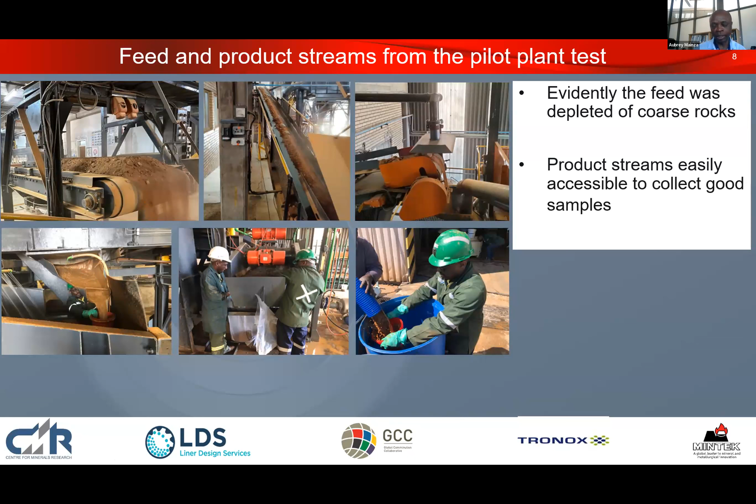The ore didn't have a lot of coarse material. This is the material going into the feed chute. And here we have the material discharging from the ag mill. Paul happily sampling that - excuse me. And then this material here would be the screen oversize being sampled and timed. This is the screen undersize. So the system was very simple to obtain very good samples from the pilot testing.

In terms of stability, most of you may know that it is very difficult to maintain stability if you have friable ore. It was a challenge to reach that, but we perfected the system to a level where we were able to get very stable pilot runs on this particular system. And what you are seeing here are just the conditions, giving us an idea of the stability of our pilot runs.

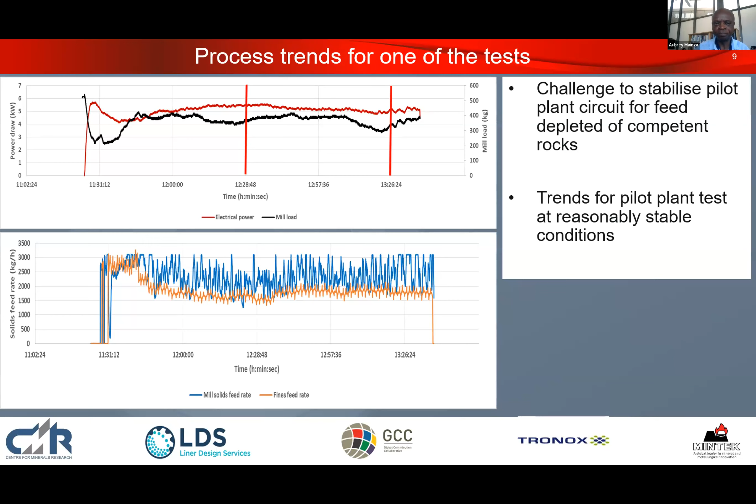This is just to give you insights on the charge inside the grinding mill. You would see up here that we actually blocked off some plugs to be able to retain some material during the pilot testing, and very little material was left in there. This is in the order of about 11 to 15% fill level during the piloting. We couldn't go higher than this.

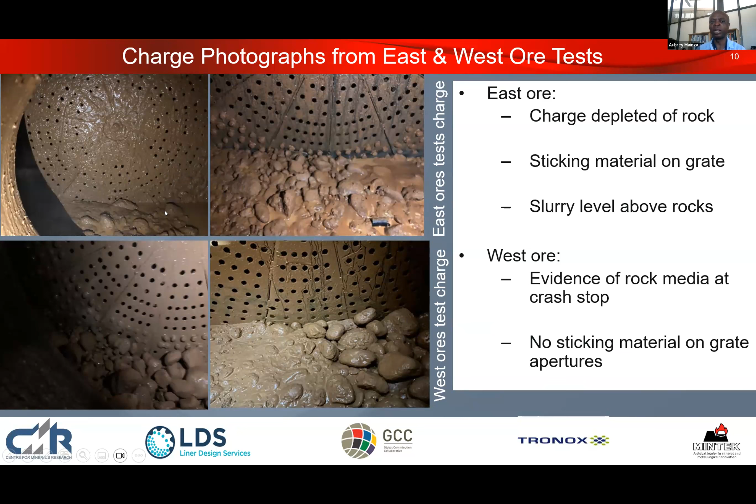At the bottom here, it shows you the contrast with the west ore, where you can see evidence of very big rocks dominant in the charge of the pilot mill, compared to the east ore, which had this sticky material. The discharge is almost covered by sticky material, and then the slurry was always above the rock load.

By way of PSDs that we got from here - on the left, we are seeing the PSDs for the east ore. If you look at the feed, that black line there, it's very fine feed. The red line is the product, the screen undersize. Then the recycle stream, which is a screen oversize, would be that material there in Botswana blue. And then the navy bluish material, PSD here, represents the mill discharge. You can see below 1 millimeter that the mill discharge is almost identical with the feed that we are putting into this ag mill.

On the right, we see a comparative test with the west ore. You can see this is very coarse, the feed, and then the product is very fine and much closer to the mill discharge than the east ore. This already tells you that taking what you do on the west mill and designing the east mill would give you a very different output. The performance between the two, for the system between the two ores, would be very different.

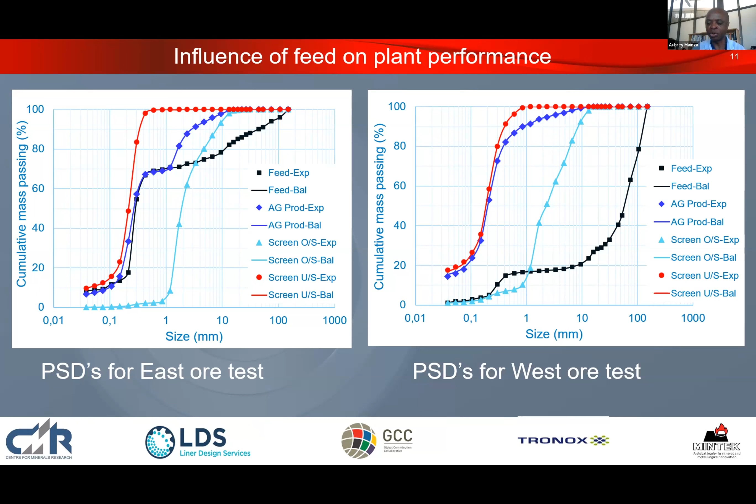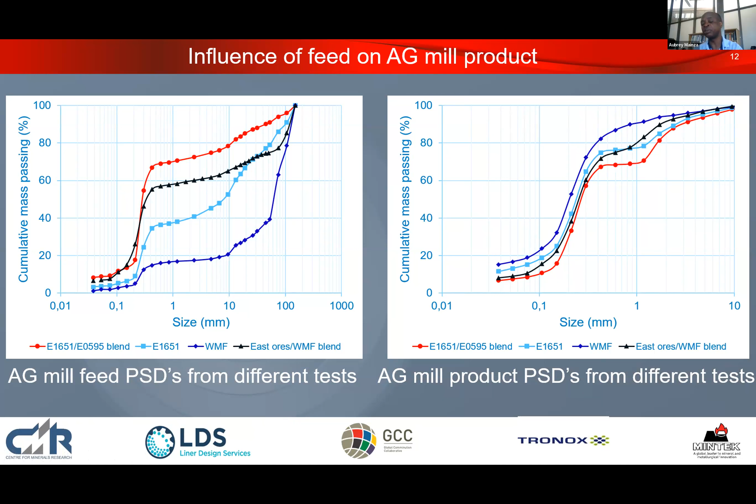What you can see on the right is the ag mill discharge. The east ore blend, this red line, is the coarsest of all the tests we did. The west mill product is the finest of all, the one with a lot of reasonably competent material that was able to build up the charge in the system.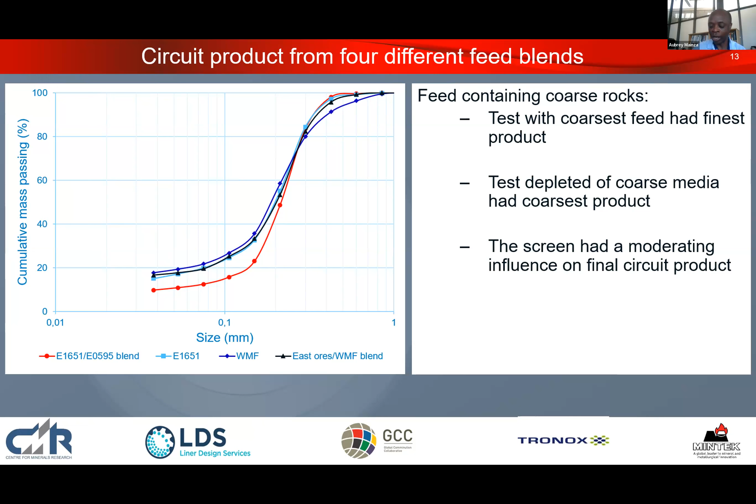Now, this is important because they were designing using a system with steel balls and getting the specific energy. So they designed specific energy before these tests in the order of 5.5 kilowatt-hour per ton. You can see it is way higher than what you would encounter using the pilot work, which is a similar system to what they are designing.

This gives you an idea of the sub-212 micron material. All the tests we did were in the range of 50 to 60% passing 212 microns. And in this particular system, material above 600 microns would represent a loss in terms of recovery of zircon, which is a key mineral.

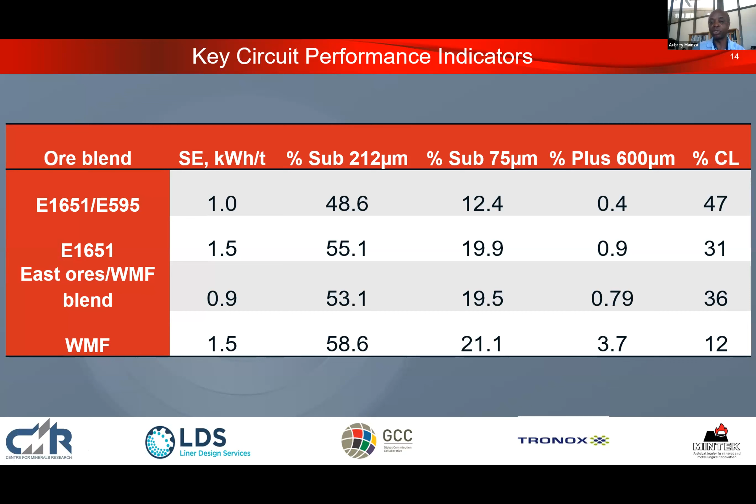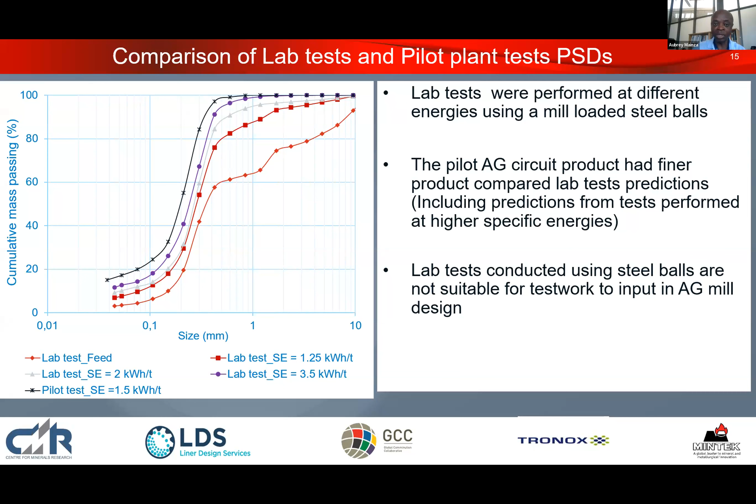This is catastrophic if you compare it to what we just looked at in the pilot plant, which is much more closer to reality than this. The second part is these tests cannot give you a prediction of whether the mill will hold the charge or not, because the charge is defined by the steel balls you put in the system. By way of conclusion, for low competency ore, an ag mill's performance will be very sensitive to the feed size distribution and the feed competency.

So you need to assess the feed competency to be able to design this correctly. The second conclusion is that using lab-based systems with steel balls are highly inappropriate for these ore types. They will be highly misleading, and they do not give an indication of the suitability of the charge to build up in your system. So beware of these tests that do not resemble the system you want to construct, and the model cannot take these as inputs to predict what an AG mill would do.

That would be the end of the presentation. I wanted to say this is the real design work that Malcolm, Sandile, and I are participating in. The second phase is to test what we can do to build up the load by seeding either pebbles or using ceramic media, and that's the next phase of testing. Thank you.

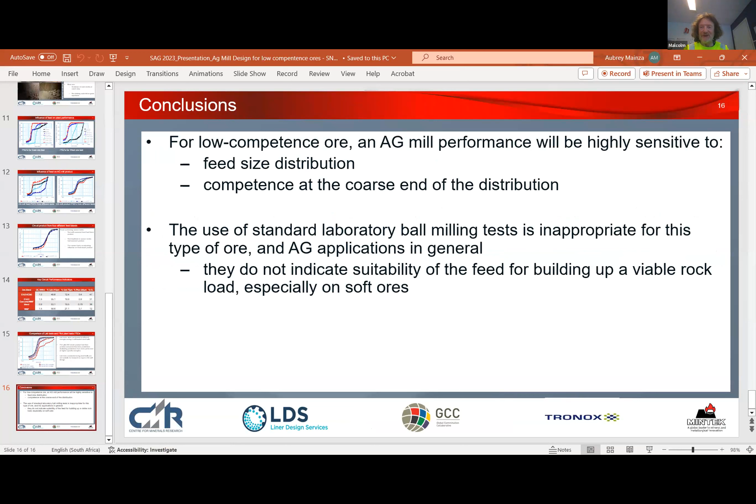I think Marcelo has a question. Yeah, so while people are warming up, just to make a short comment. Fantastic presentations there, but really just take advantage of a minute of Aubrey's time.

I think it's also a great conclusion you get, that in certain situations people insist on doing SAG milling pilot scale tests because they are not quite sure. But I think AG milling, especially for very unusual ores, we're far from being confident at the bench scale. So it's a great case to show that the easy question is no, if you want to go to bench scale. But if you want yes, you have to do a little bit more work, or quite a bit more work. I think it's a fantastic example. It really speaks a lot to the type of itabirite iron ores that we work with here in Brazil. I think it would be a fantastic opportunity to apply, but of course there's a lot of cold feet around that because you have to do the pilot scale. But congratulations to all three presenters.